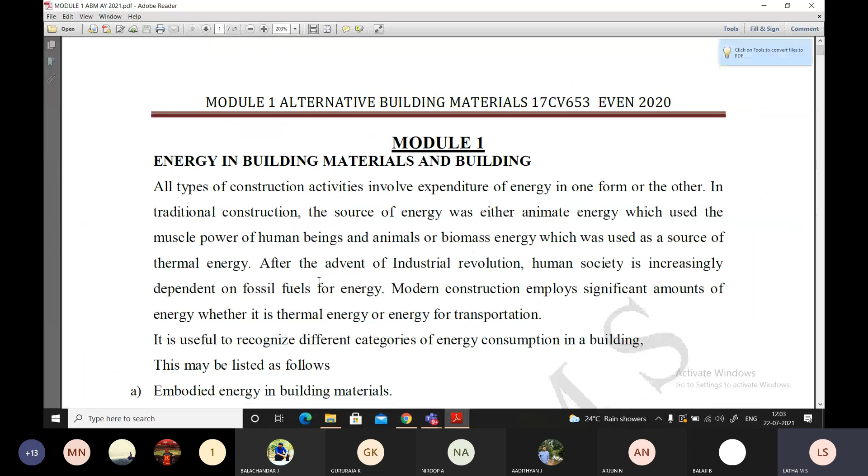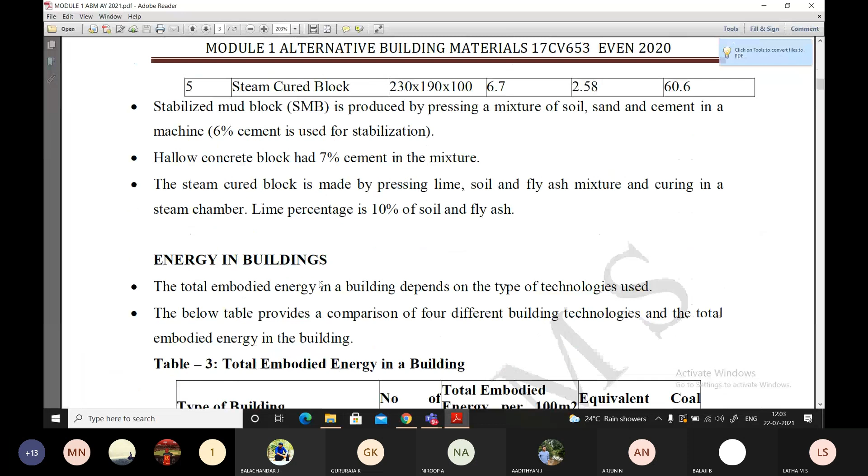Yes? Yes? Yes, students? What's the need for alternate building materials, which covers in module 1? There should be a reply from your end. Can you see this?

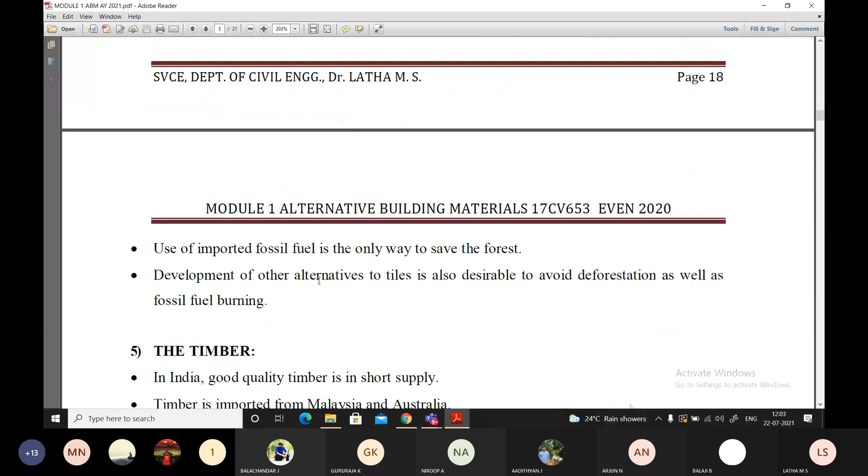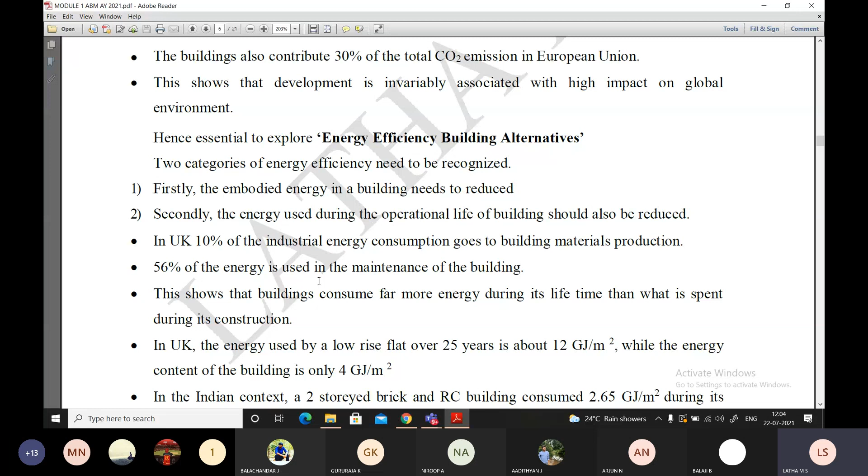Yes, in points at least you can say. What is that? You can see very well on the screen. Yes, students, can you hear me?

First, the embodied energy in a building has to be reduced. For that, we are looking for alternate building materials. Secondly, the energy used during the operational life of the building should also be reduced, which is only possible by using alternative building materials.

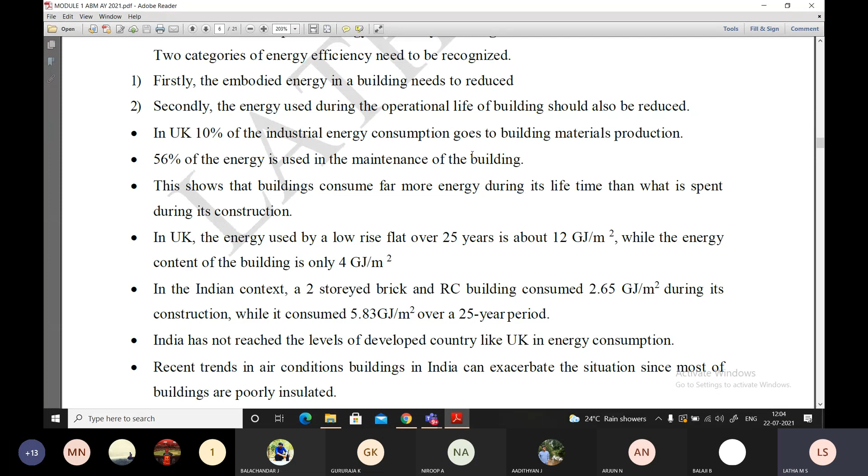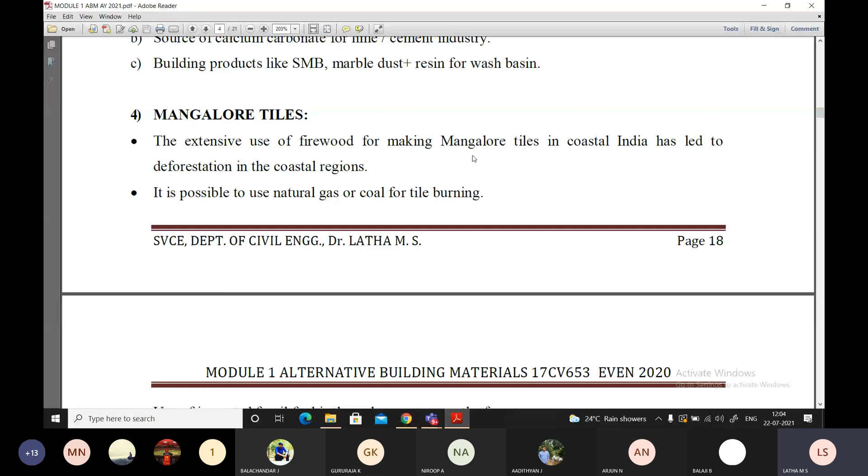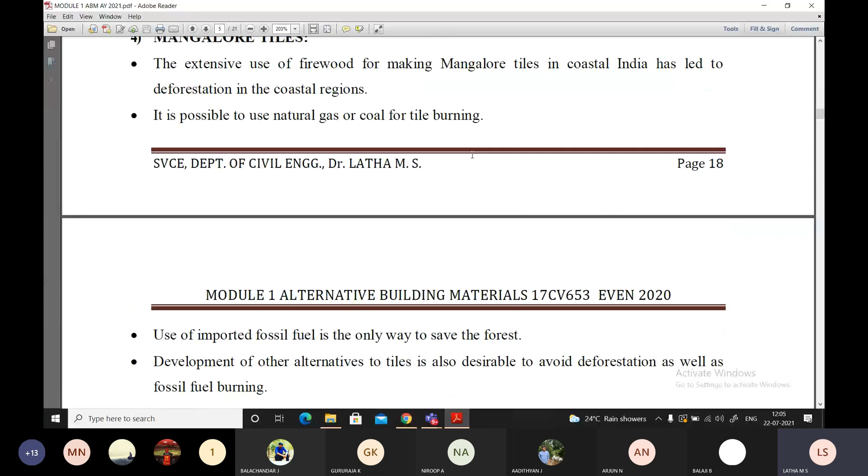Otherwise, it is not possible, such as stone is an example, then topsoil for brick construction, pollution of marble dust. All these are very good examples which are contributing towards the global warming of the earth.

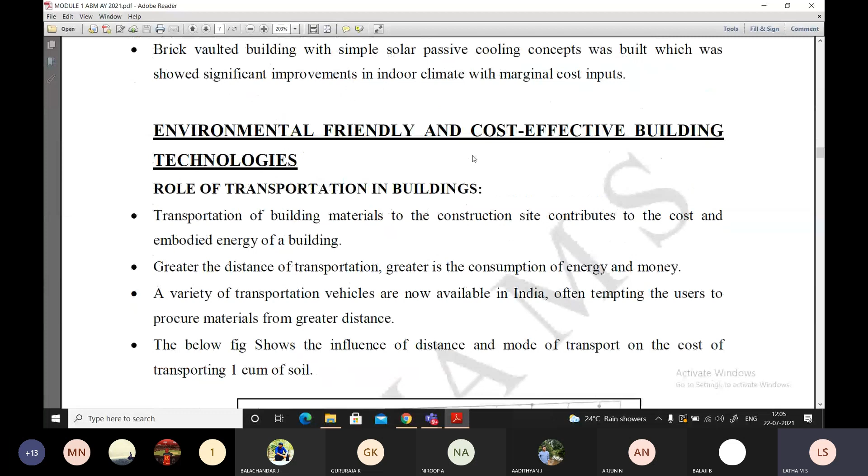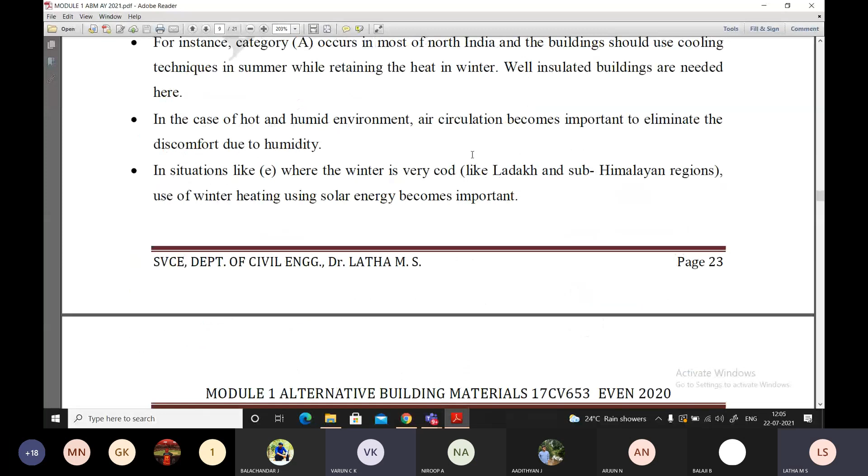Yes, students, you remember writing the test answer. It is asked for very good marks, some 6 marks it has been asked. Yes, 6 marks, it is a question of 6 marks.

Similarly, you have one more question. List the different types of energy consumption in a building. What are the different types of energy consumption? Can anybody answer?

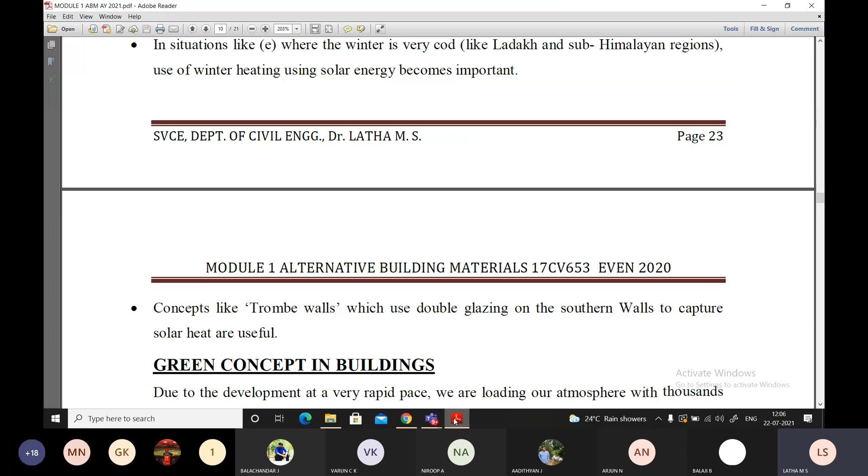Different types of energy consumption in a building. What are the different types of energy consumption in a building, students? It's a revision class, you have to talk here. It is not that you go silent.

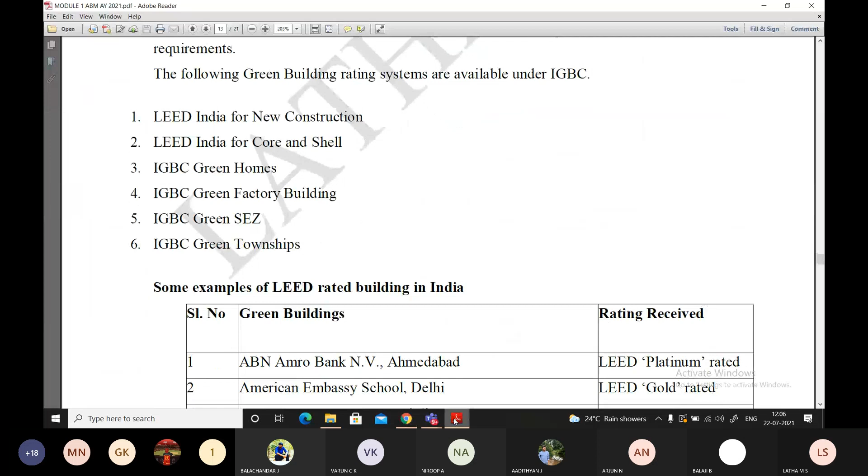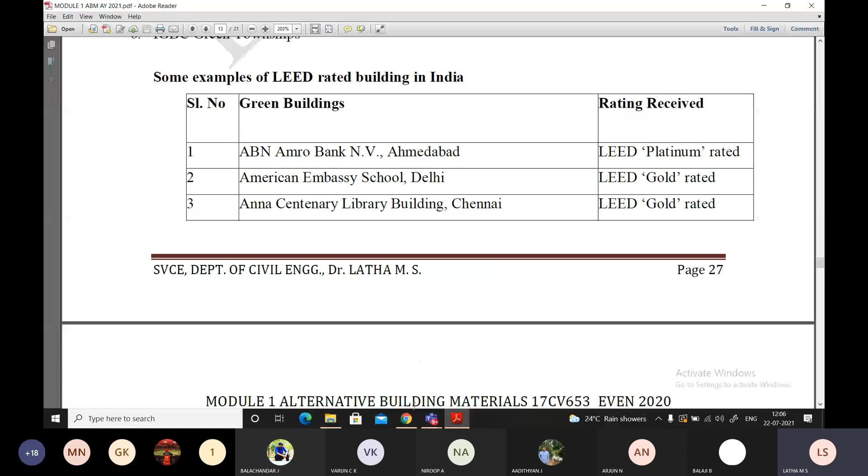Yes, students. Was a question asked? You're all there in the class. List the different types of energy consumption. Types of energy consumption.

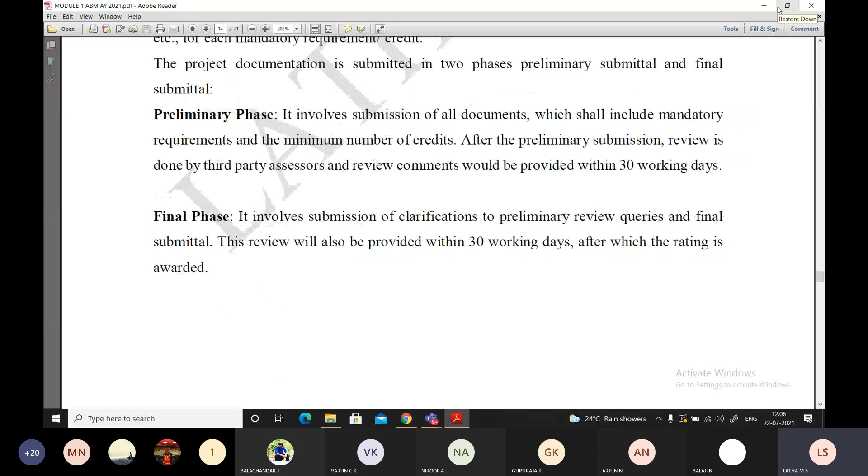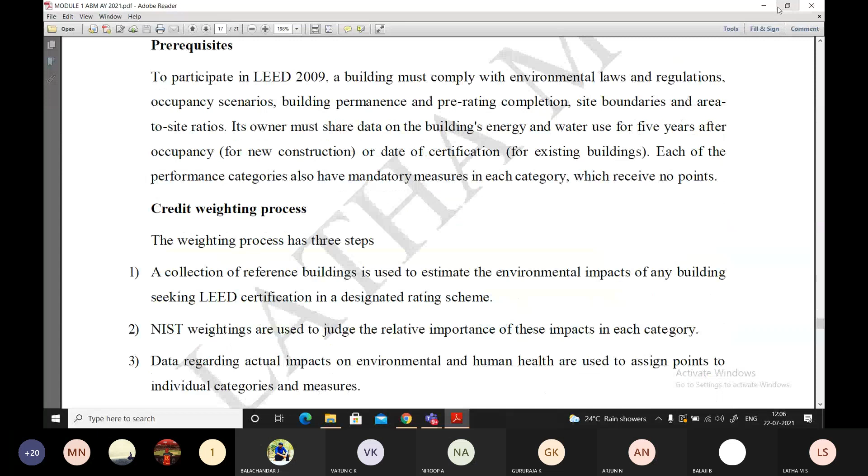Different types: embodied energy, then... Yes, what next? Correct, what is the next? Energy consumed during building construction. Very good. Then energy utilized for maintenance during lifespan of building.

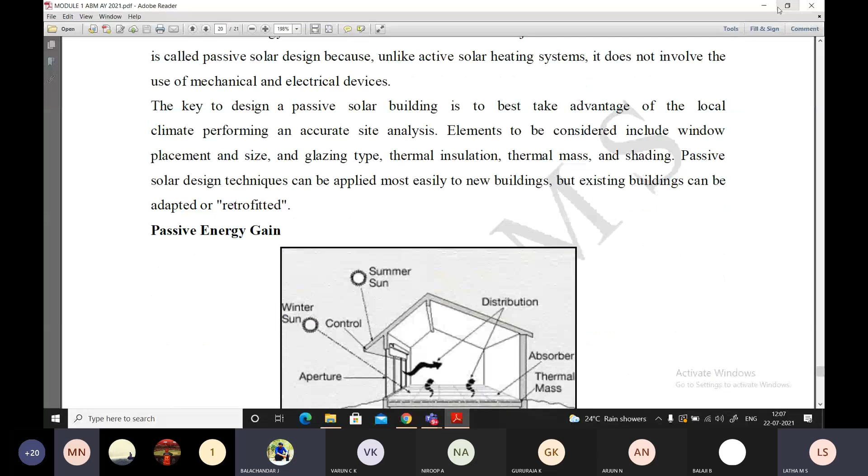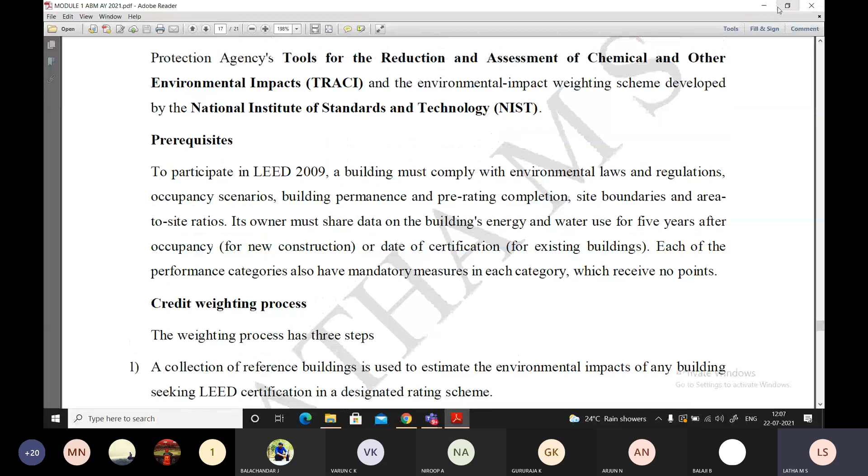Yes, very good. So totally how many do you find? You find 3 or 4? 4. Repeat once again. All the 4, you repeat. You're correct, repeat all the 4.

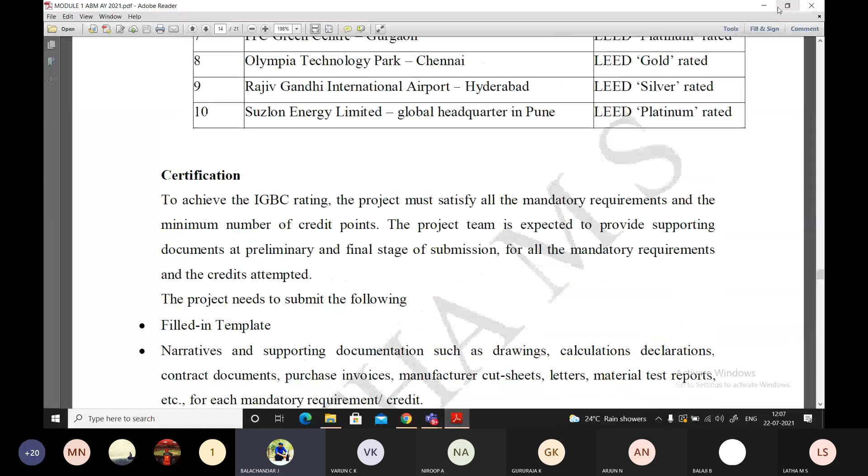Embodied energy in building materials. Then energy consumption during building construction. Energy utilization for maintenance. Then energy spent in demolition of building.

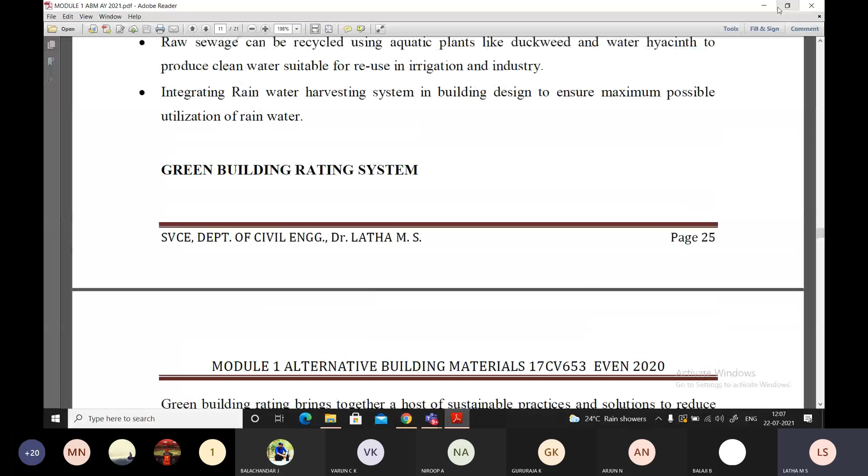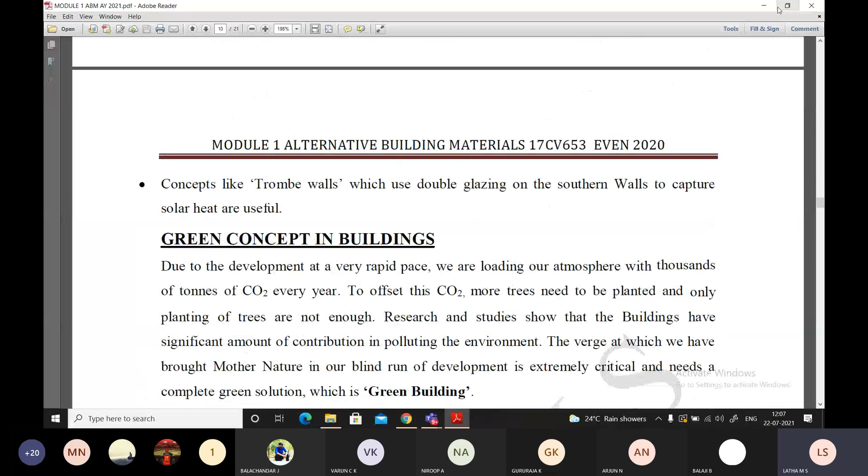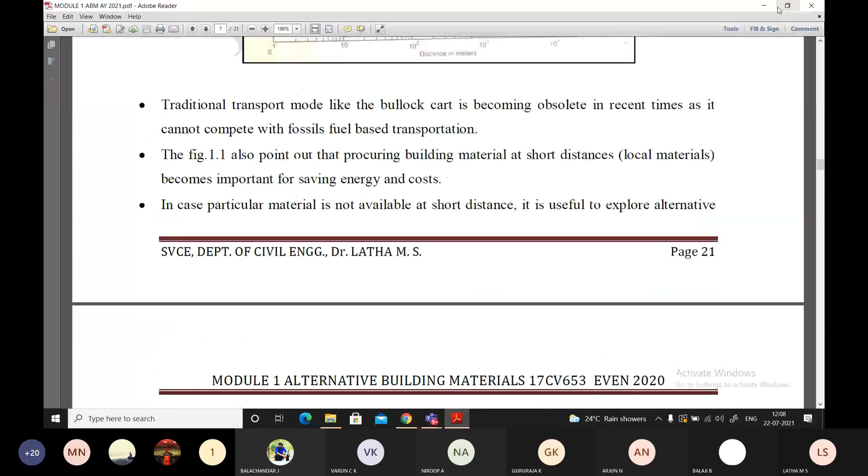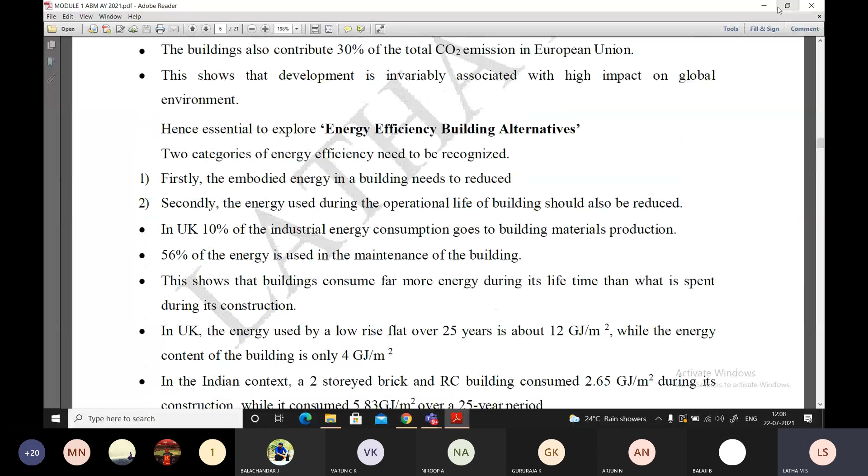Yes, very good. Can you explain any one of those? What do you understand? Can you explain any one of it? Or do you understand the line asked for it? What is the energy consumed during construction? How do you define that statement? How to reduce the consumption of energy? How to defend, how to defend?

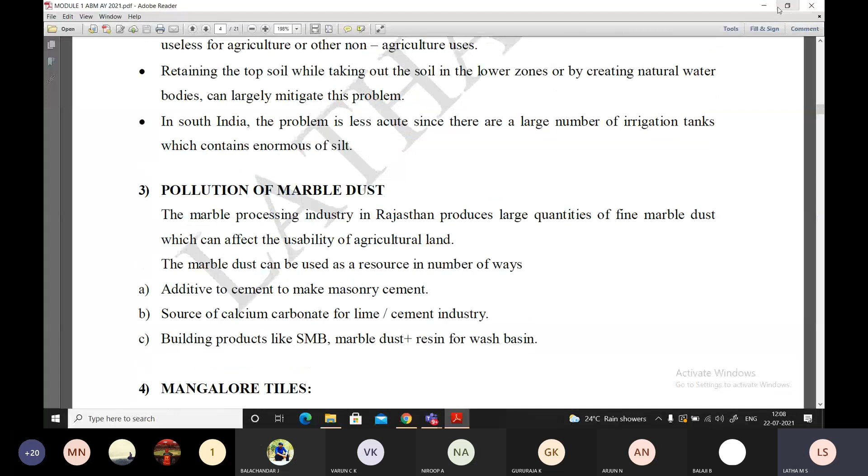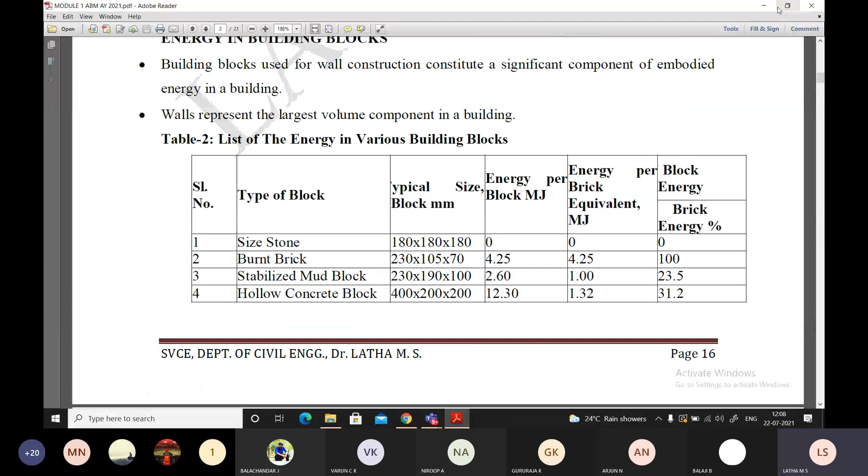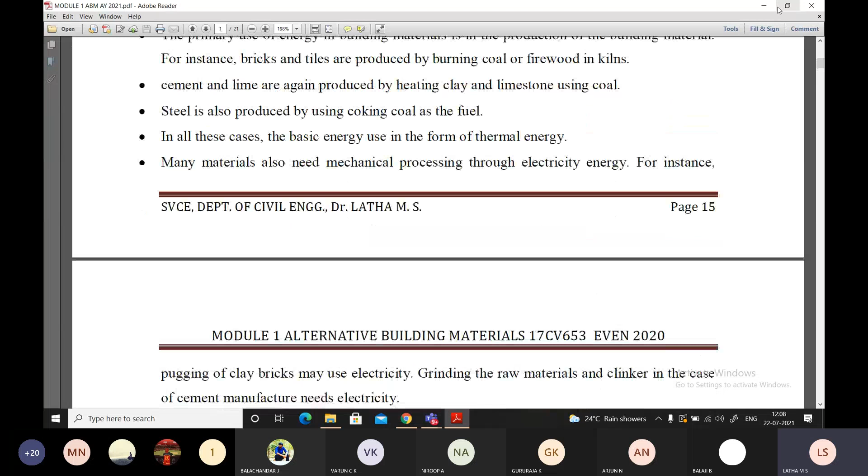How to defend, students? For example, you have a material to purchase for construction. Suppose for flooring, let's think about a granite flooring, marble flooring, or madras flooring. You may have to purchase at an area nearby so it doesn't cost more—it should be minimized.

So there is embodied energy in building materials during construction. You should reduce transportation so that materials can be purchased easily. Not that you transport materials over 100 kilometers, which costs in terms of energy also—not only money, but energy too. So you have to avoid that parameter of purchase.

Similarly, energy is spent in demolition, because whatever material you get after demolition has to travel a distance, so that has to be avoided. How to avoid that? You have to look for a site with a dumping yard for these materials, or the demolished waste can be reused as fine aggregate or coarse aggregate. That should be the feature.

If you think of energy utilized for maintenance during the lifespan of the building, that is also very important, because during the lifespan cracks may develop, painting is required—all that is extra energy contributing to your building. How to overcome that? You have to decide the best way to make the building perfect, or reduce maintenance.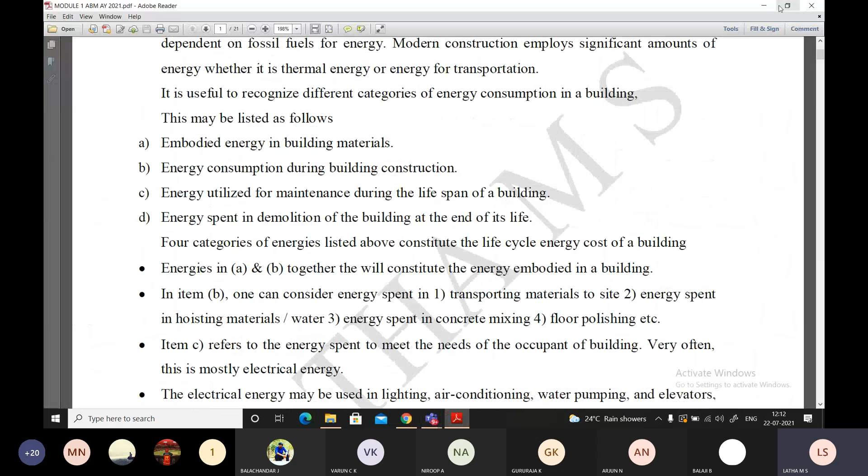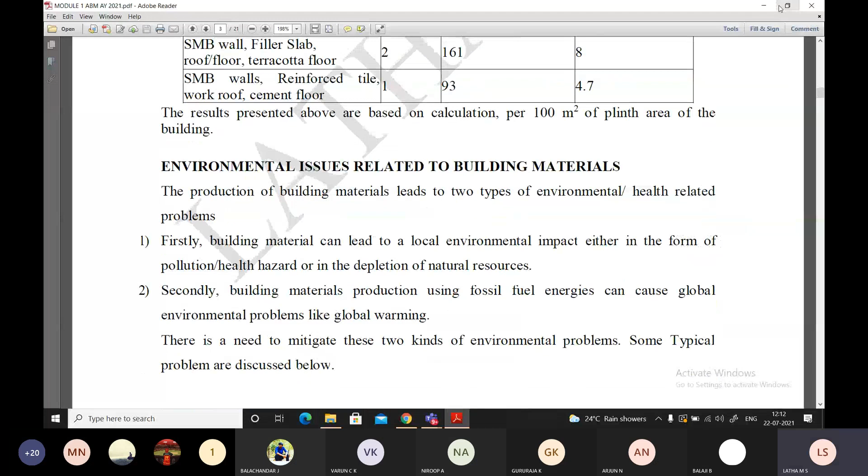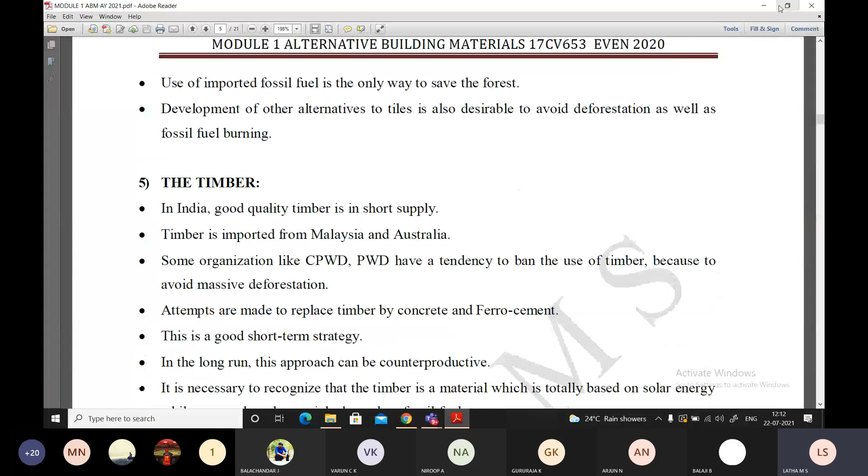Apart from that, you have plastic, wood, plasticizers, many things—we can keep listing, like precast elements are also required. So how is this contributing to environmental issues? What are the main features we've taken up for discussion? You find stone, topsoil for brick, pollution due to marble dust, Mangalore tiles, timber.

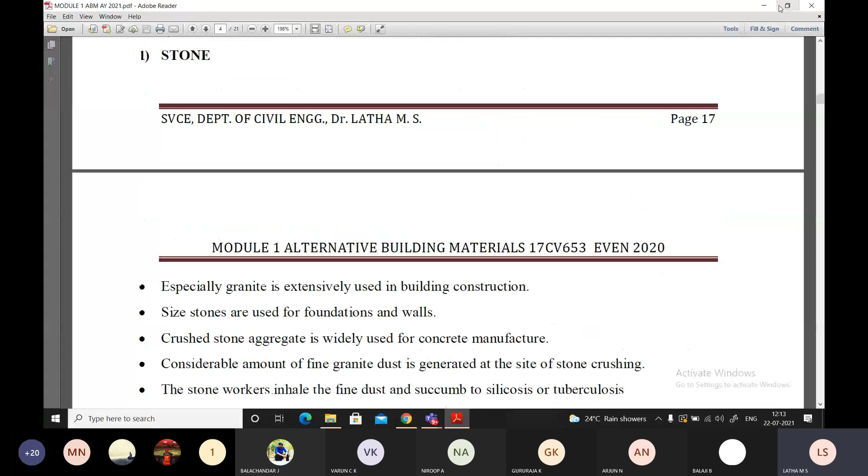All of this is contributing towards global warming. We have to understand how each one contributes. Can somebody talk on stones? Very general topic—yes, stones.

How do we use these stones in our construction, students? We can use it as a size stone for the foundation and walls. Or it can be crushed stone, used as aggregate—fine aggregate and coarse aggregate. In this way, stones have been very well used.

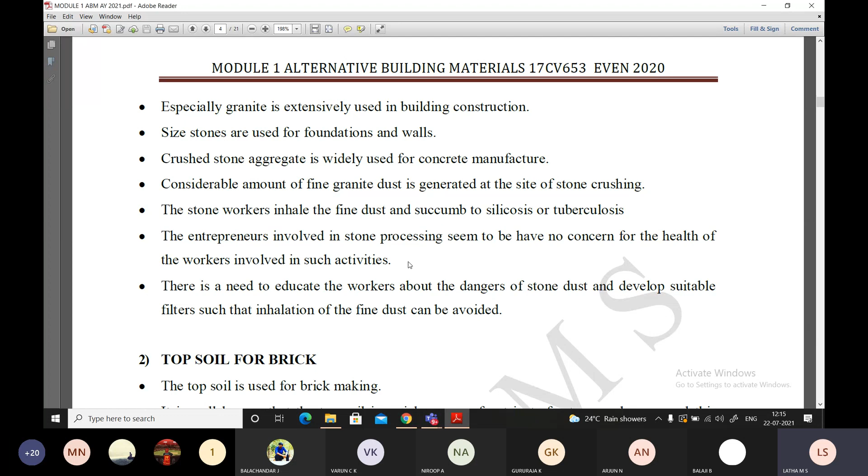So if I'm talking about topsoil, what is topsoil? You are all environmentalists now, students. Is that the right word to use? No, you are all very good civil engineering students, to tell completely. Now, how will this topsoil affect things? It is very much seen on the screen. I'm not asking you to answer out of your own mind, it is very well seen, you can answer.

Yes. Yes, students. Yes, students. Yes ma'am, yes, tell me how topsoil will affect. Yes, how is this? Please read out, it is completely written.

Should I use the topsoil? Topsoil, you understand, something like half a feet below, you can see that soil, can be used or not for the brick making purpose. Very simple question I'm asking, very simple question. Yes ma'am, yes, is topsoil advisable for the manufacture of brick or not?

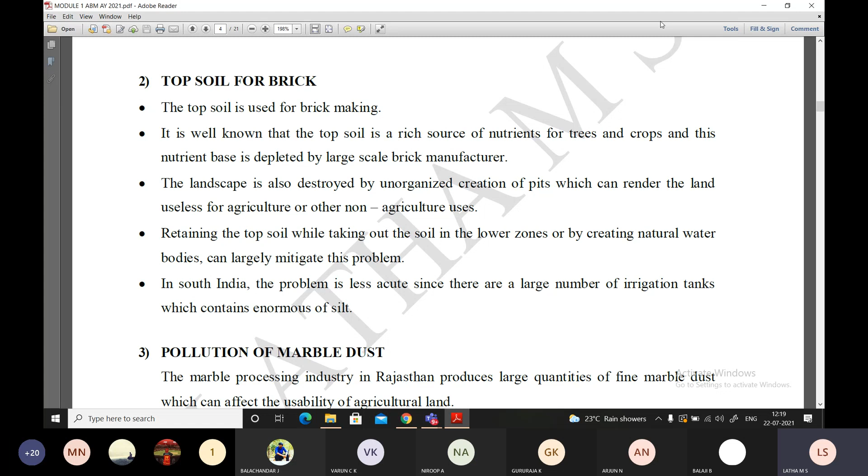Is that you advise somebody, yes, use topsoil? Topsoil which is seen, I mean to say 500, half a feet, 6-inch depth, you can see that topsoil. Topsoil is very good in nutrients because the trees and crops are receiving the nutrients at the topsoil, and they are making the landscape of the building or the resources around the building. So it is always advisable, for the making of brick, students, it is always advisable to take the soil below, underneath, so that you retain the topsoil which is required for any other purpose. So we don't disturb the topsoil for brick construction. That is the pollution what is happening, but people are not aware of all this. They start scraping the topsoil and start using it for brick manufacture, right?

What about the pollution of marble dust? Okay, for the pollution of marble dust, you can think of a person who is doing this work in the industry. Have you visited any place where marbles are being manufactured? I have visited, I've seen the labor working literally, he is white and white, students, he is white and white. You cannot recognize that labor who is working in the marble dust because he is completely white.

So the owner who is appointing him should be taking care of his complete health. He has to be provided with all the health care, should be provided with a proper gown so that he can well use it and start working. Because marble is a very good material for the construction of flooring, steps or slabs, right? You can also use it as a lintel or sill material, for when you provide an opening for the window, you can go for a lintel or sill using marble. But that marble has to be provided with a fine finish. When you start grinding that marble, the dust comes out. These dust particles are very fine, students, very very fine, because if you keep doing it, this dust particle will enter into your nostrils and your lungs, and therefore you have a complete health problem.

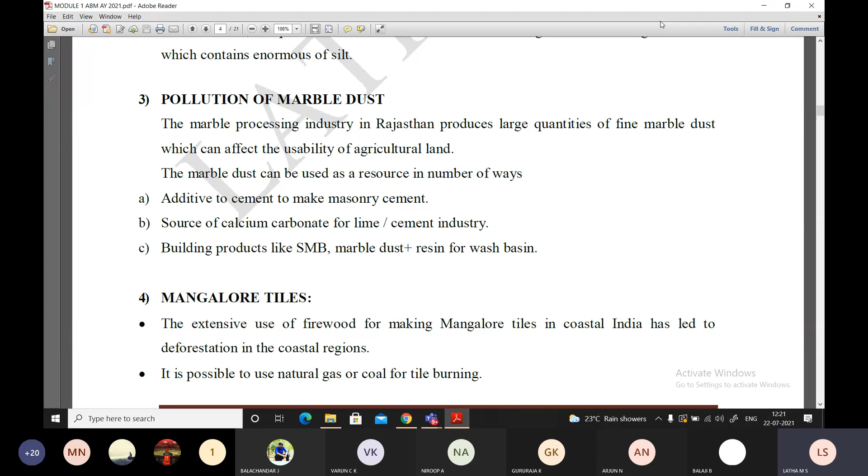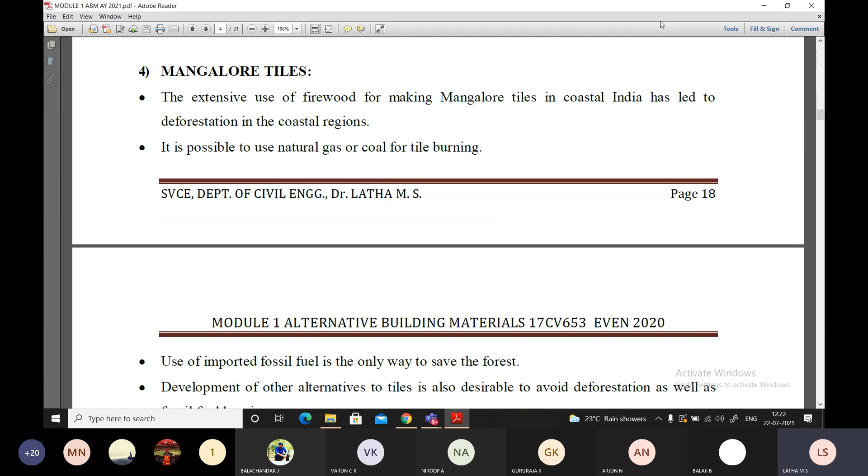Okay students, now coming to Mangalore tiles. What happens when I talk about tiles? There is a huge amount of burning taking place, so tiles cannot be prepared just like that. Ferro cement is a material wherein you can prepare tiles in no time. But Mangalore tiles require burning, they require a huge amount of fuel.

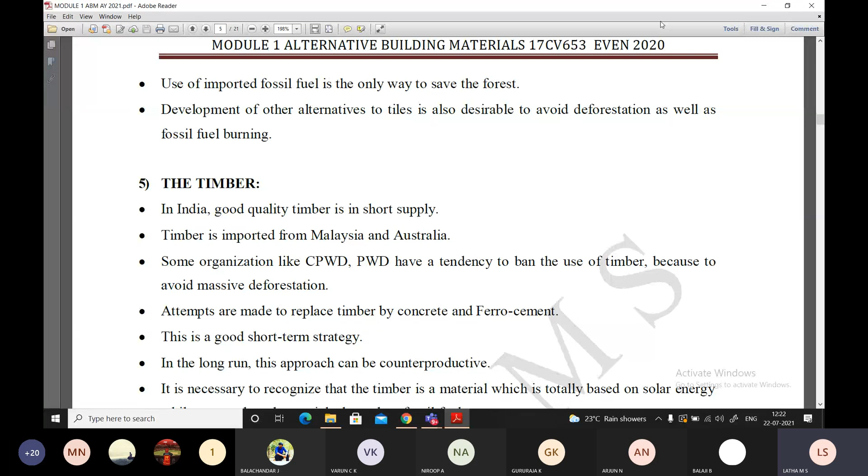So what happens? Fuel means there will be deforestation and all that taking place. Burning will take place, pollution will take place. So to avoid all that, should I stop manufacturing Mangalore tiles because it is polluting? Should I stop, or should I, as an engineer, as a researcher, as a scientist, think of Mangalore tiles in an alternate way?

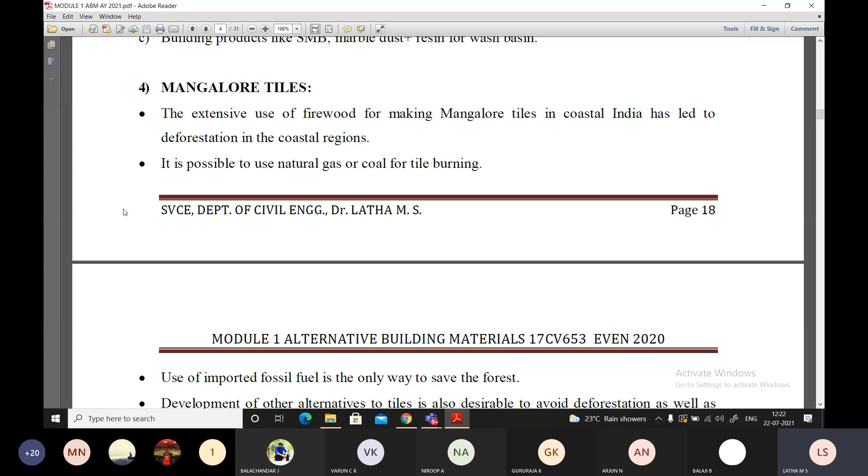Even for example, timber is a very good material, students. Timber has a very good life. They say it has been imported from Malaysia and Australia, but timber is also being manufactured in India. We have timber trees, but it is not meeting our requirement, so we have to import. When importing, we have to account for the cost required to import that material, and you have many carvings available and all that.

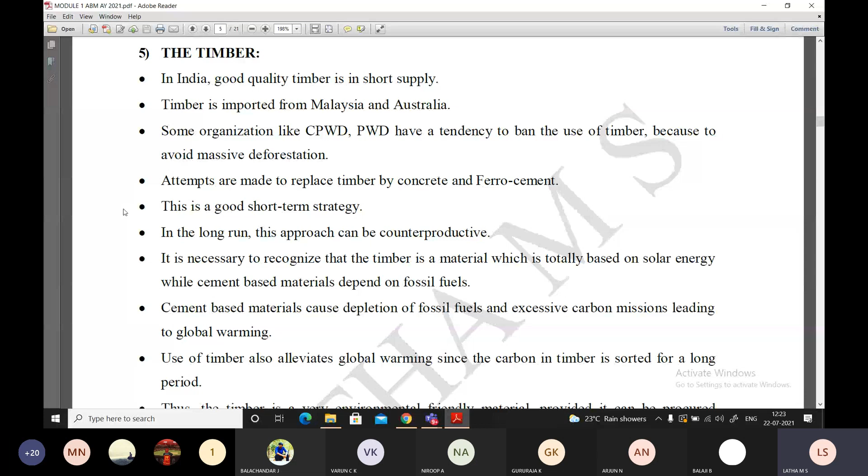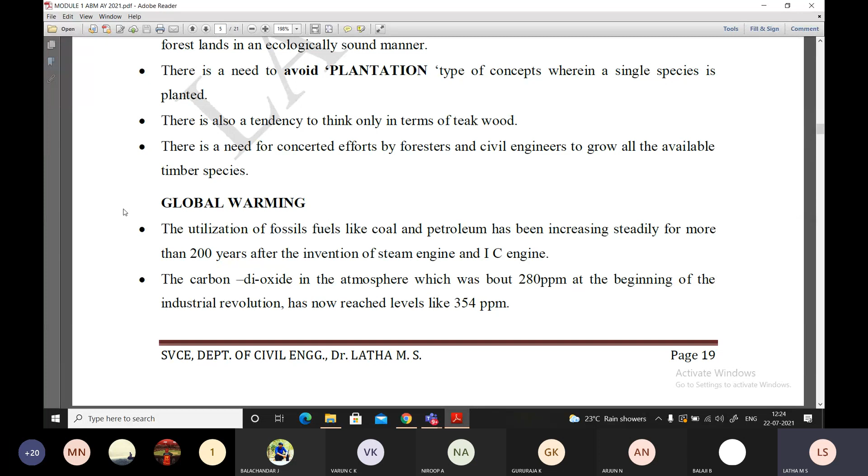And therefore, doing all this, students, global warming will calm down. The globe will not get warmed up, it will lessen, the carbon footprint will be reduced. So you have to think about all that. There's always a way, students. If you keep thinking, there's always a way behind the problem, but the solution you have to give. That is necessary behind every engineer. There are a number of engineers, but not all are engineers. The engineer who gives a solution to the problem is an engineer.

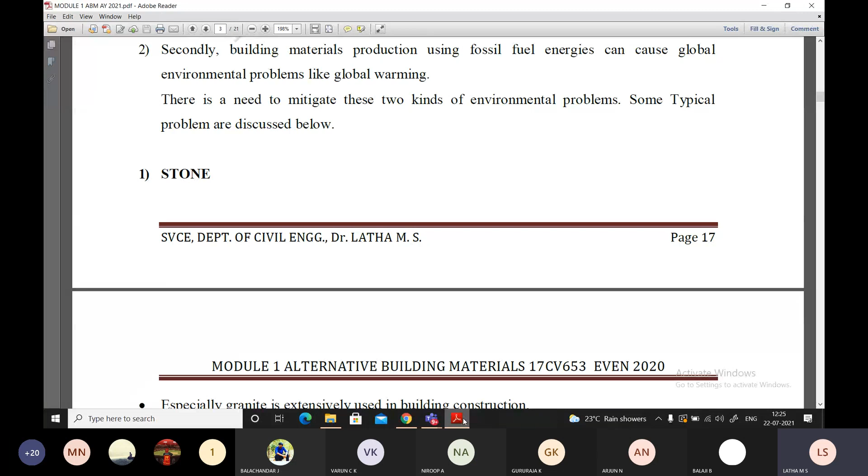Now, steam cured stabilized blocks - steam cured stabilized blocks is not there, but stabilized blocks is there. What do you understand by stabilized block, students? How do you prepare it, how do you manufacture it? They call it in many ways: stabilized building block, stabilized mud block, stabilized blocks, soil stabilized blocks.

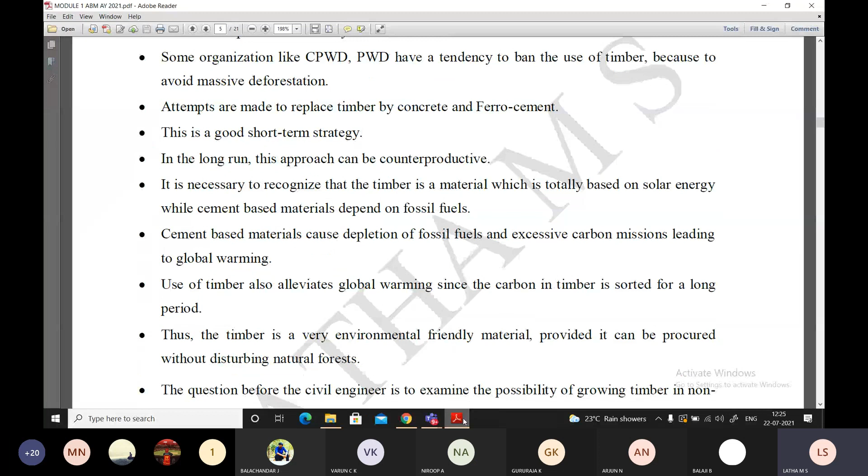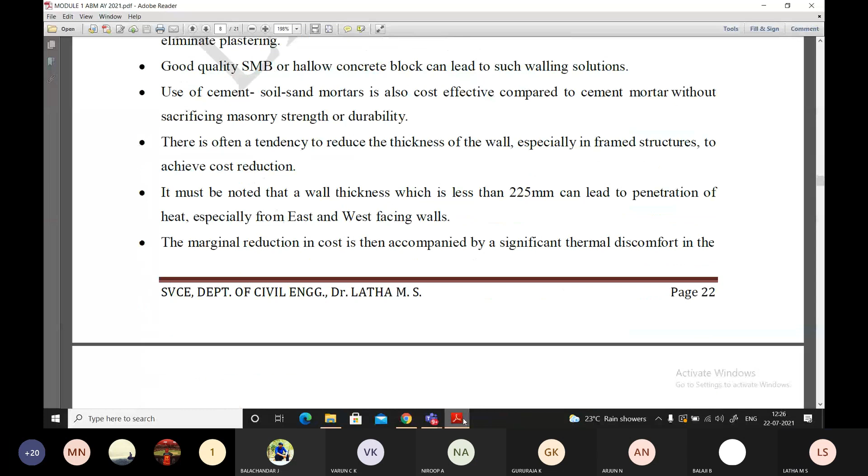Now, what is stabilized? In the earlier class also I spoke about stabilization. Can you tell me what is the exact meaning of stabilization? What is stabilization?

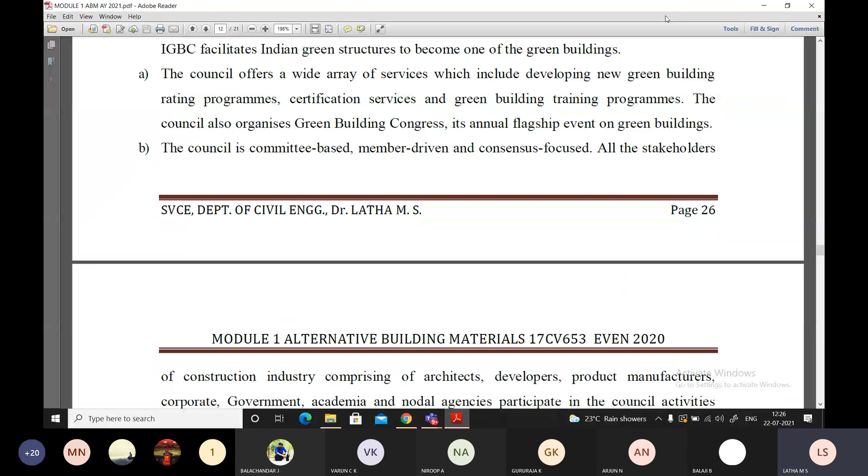There are 40 students in the class. Anybody? It's just a simple question. What is stabilization?

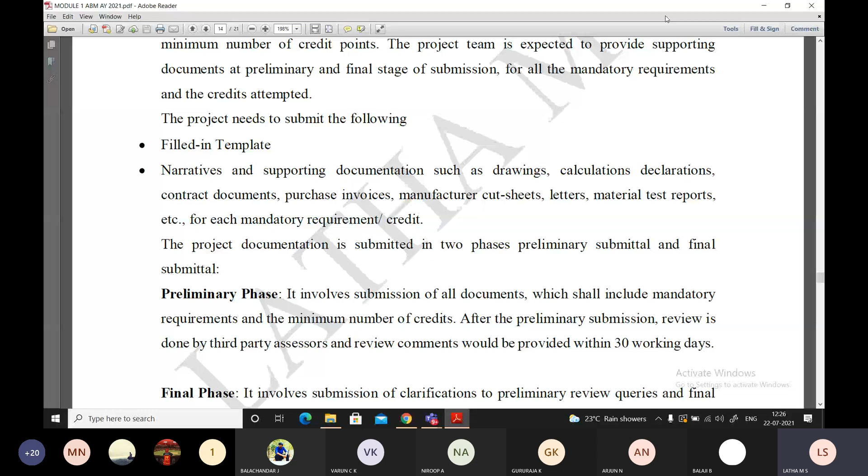It is nothing but improving the physical and chemical property of a material. Stabilization is nothing but physical and chemical. What should I understand as physical property? Physical property is strength

and shrinkage, or just strength alone can be a physical property. What is chemical property? I'm improving properties like liquid limit, water content and all that. Those are our chemical and physical properties.

Strength is what I'm improving. How does it get improved, the physical property? Only when I'm doing a chemical property enhancement. How does the chemical property enhancement take place? When I mix it with a stabilizer. What is a stabilizer? Cement is a stabilizer, and lime is a stabilizer.

What does it do when I add that to soil? It will improve the value of liquid limit, plastic limit, and shrinkage limit. So ultimately it gives value to the soil by giving a higher compressive strength. That's how it relates to stabilization.

Now, stabilized soil block. Should I stabilize a block? Is that necessary? Without stabilization, can I get a soil block? Yes, students? No, ma'am, no, ma'am.

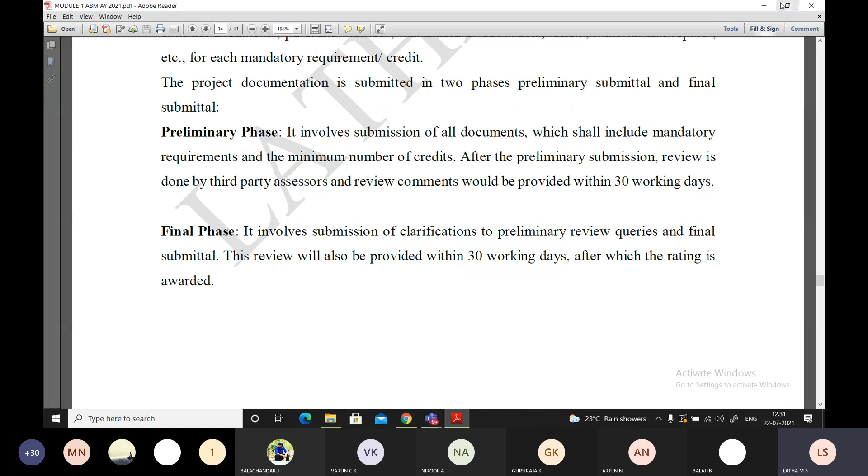Steam cured means something like making idlis at home. Your parents prepare idli at home for breakfast, lunch or dinner. You take the batter or dough of idli, put it in an idli stand, and steam it. What comes out? You find good idlis which are eatable.

Similarly, the blocks which I compress, I put into a steamer. This is a steam chamber in the laboratory. Steam chambers are available for this purpose.

If I leave that steam block for 24 hours within the steam, it will give me the equivalent strength of 28 days, students. Equivalent strength of 28 days, right?

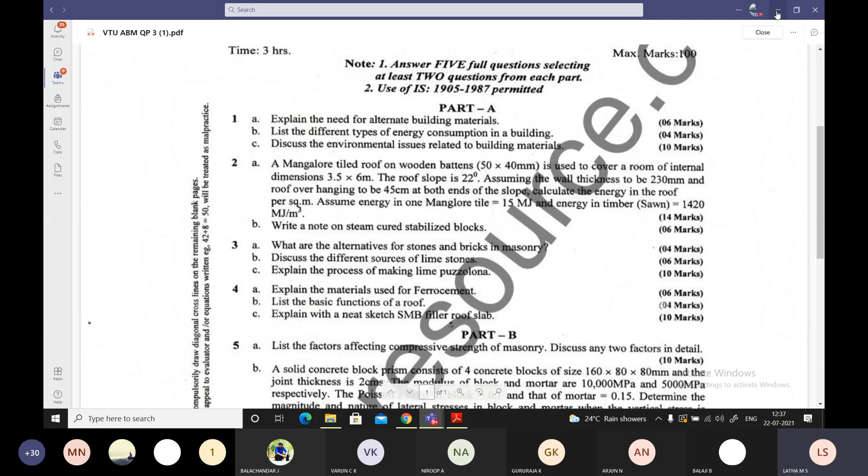Tell me students, what are the different sources of limestone? After this, I'll end the class. Different sources of limestone, where do you get it? From where do you get this limestone? Where is the availability of limestone? Availability of limestone, sources, what are the sources?

Module 3, you have to interact, you have to interact. So in the next class, students, you have to come prepared for module 3. You have to answer, correct? Only I will talk on module 3. Okay, students? Or is that only on module 1? We'll discuss. Something you should answer.

Yes or no? Which module do you prefer? Module 3 only, module 3. Okay, module 3 is okay with everybody? Everyone is okay with module 3? Okay, okay, fine. Okay, yes ma'am. Yes.